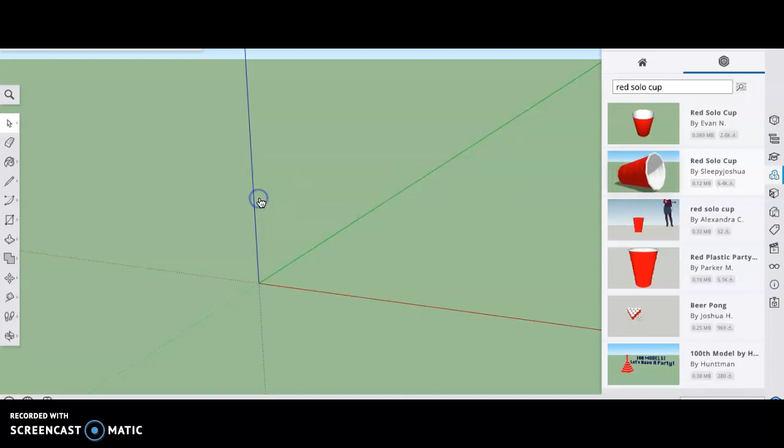You're going to select it, drag it into your document, and place it. Then you can close your Components tab, and you'll see it's far away and we have to zoom in.

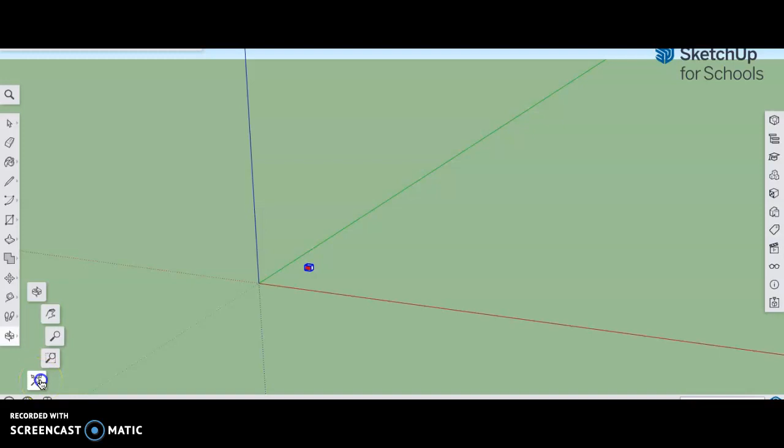To zoom in, you can go over to your view, and use this button down here, which is Zoom Extents, which allows you to zoom all the way in to it. Now this might be a little too close, so I can just use my keyboard to make it go out a little bit.

The next thing you're going to do is select this Move tool, and you're going to want to select Scale. That highlights the whole thing, and you should be able to see all the different points of the cup. We're going to want to adjust our scale here.

So we're going to select it because our cup is still too big, and you'll see it says scale in the corner as 1.0. Oh, hang on, let me make this a little bigger, one sec.

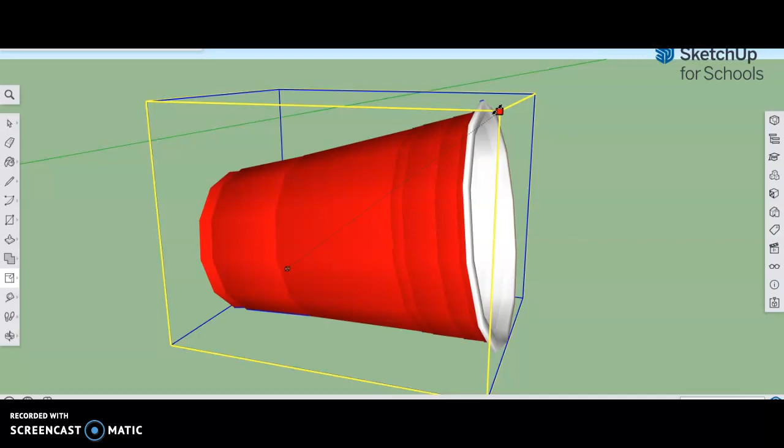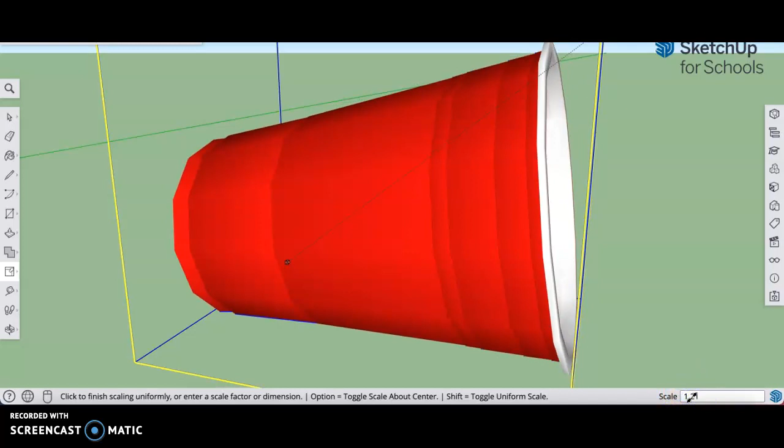Okay, so we're going to select our scale tool. You're going to click on one of the corners, and for the scale box down here, you're going to select the corner box and click 0.5 and hit enter. Type in 0.5, enter, and that will resize your cup to half the original size.

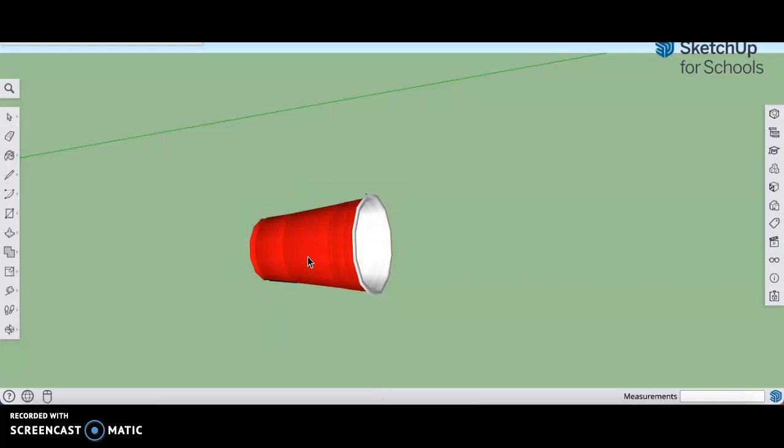From there, you're going to want to select all. So select it, hit Command C, then Command V. What this does is it copies the cup and gives us a second one that we can line up with our original.

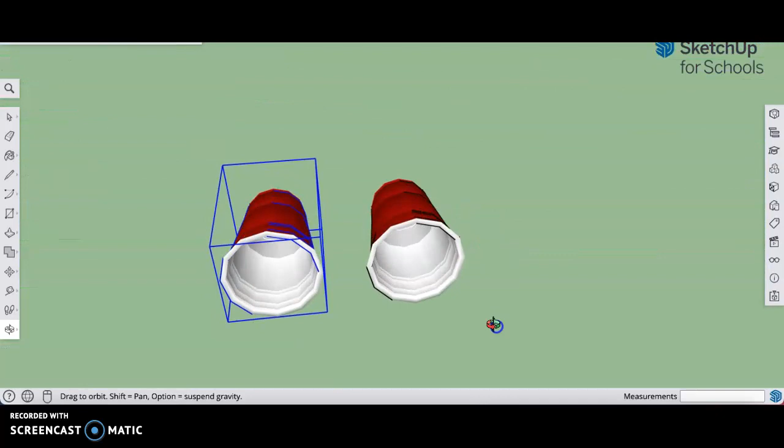Then we can use this tool to orbit around and see our cups from a different angle. So at this point we have our two cups, which are going to act as our amplification for our sound for our smartphone. And then we're going to connect those pieces.